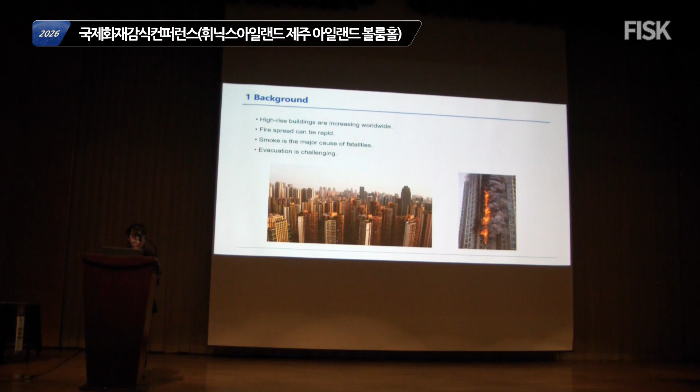The residential estate where the fire occurred consists of 8 buildings with a total of 1,984 residential units. Each building has 31 floors, with 8 units on each floor. According to data from the 2021 Hong Kong population census, the total population of the estate was 4,643. Prior to the incident, the estate was undergoing external wall renovation, and all buildings were covered with scaffolding and protective mesh.

With this background in mind, I will now move on to the fire incident itself. At approximately 14:51 on November 26, 2025, the fire broke out in one of the buildings. 10 minutes later, the fire spread to other buildings. At 15:02, the fire was upgraded to a 3-alarm fire. At 15:34, it was further upgraded to a 4-alarm fire. By then, 7 buildings had already been engulfed in flames.

At 18:22, the incident was escalated to a 5-alarm fire. At 1:50 on November 27, open flames had been extinguished in 3 buildings, while only scattered fires remained in the others. However, at 23:15 that night, one building ignited with significant flames, and 2 other buildings showed visible fire activity. Finally, at 10:18 on November 28, the fire was largely extinguished. The entire incident lasted 43 hours and 27 minutes.

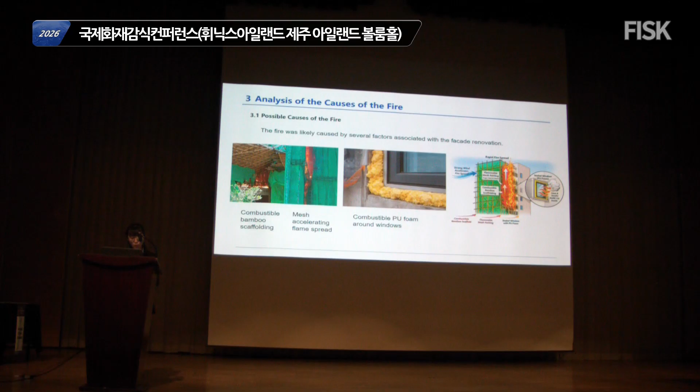According to preliminary investigation data, the fire initially started in the protective netting on the lower exterior of one building. After 10 minutes, the fire rapidly spread through these external materials to nearby structures. The exact ignition source is still under official investigation, and law enforcement agencies have already made arrests related to suspected violation of construction regulations.

From the perspective of fire science, several key factors contributed to the rapid fire spread. First, combustible exterior covering materials. Materials used in the renovation work, such as bamboo scaffolding, dust-proof nets, waterproof tarpaulins, plastic protective mesh, and foam coverings, have relatively low ignition points. Once exposed to a fire source, they can ignite easily and promote rapid flame propagation.

Second, the chimney effect. The scaffolding surrounded the entire building and created cavities between the scaffolding and the wall. In addition, the building facade and recessed structural features together likely produced a chimney effect, accelerating the upward spread of the fire.

Third, a combustion chain reaction from the outside to inside. Burning exterior materials could ignite covered windows and indoor combustible materials, allowing the fire to spread from the outside facade into interior spaces.

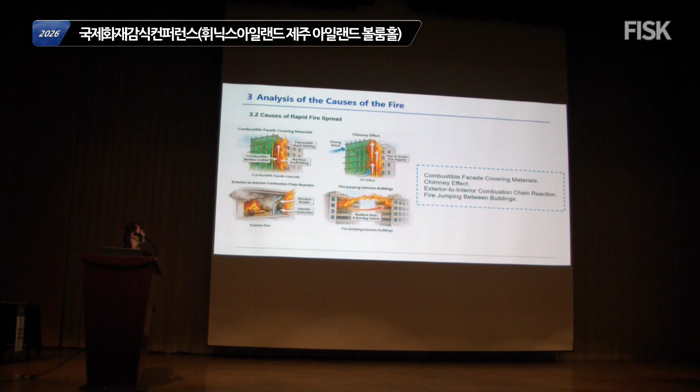Reports indicate that at least one building's fire alarm system had been temporarily disabled, to allow construction workers to move in and out of the building more conveniently. As a result, the early warning function was limited during the initial stage of the fire. In addition, the rapid spread of smoke and the failure to hear alarm signals may have delayed indoor fire response measures and evacuation actions.

Limited firefighting equipment also contributed to the delayed control of fire. The fourth limitation involved the aero-ladder trucks. The main operational firefighting ladder vehicle in Hong Kong has a maximum working height of 56 meters. However, the building involved in this incident was 31 stories high, exceeding 90 meters, and had been standing for 42 years. This means that when the fire spread to the middle and upper floors, existing external rescue equipment could no longer reach the affected area effectively.

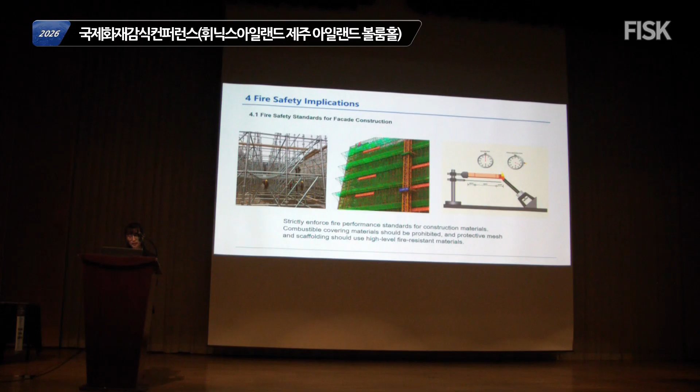During facade maintenance or renovation, residential complexes must strictly enforce fire-resistant standards for construction materials. Combustible covering materials should be prohibited, and scaffolding and protective sheeting should use high-grade, fire-resistant materials. High-rise and large residential buildings typically rely on automatic fire alarm systems, as they are the primary early warning and evacuation guidance mechanism. These systems must remain fully operational during construction or renovation periods, and intentional shutdowns should be strictly prohibited.

This fire showed a rapid spread from the exterior into multiple buildings, highlighting the need for stricter planning and inspection of vertical and horizontal fire separation measures within building complexes. This includes fire-resistant zoning, facade insulation systems, and smoke control systems.

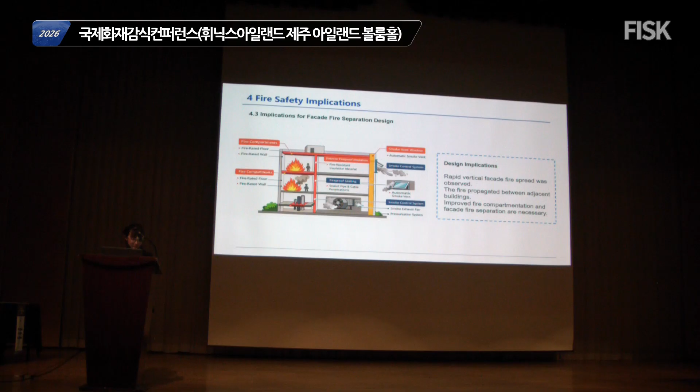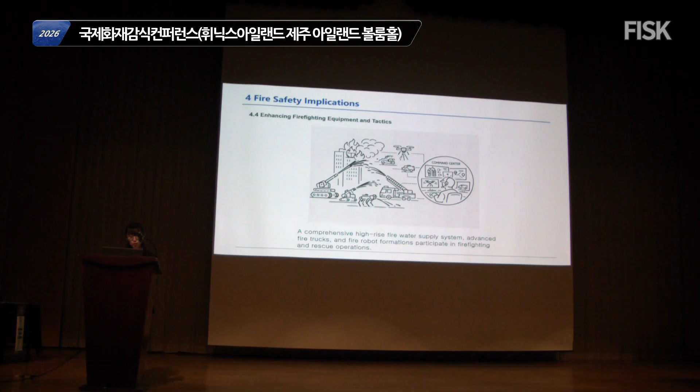Firefighting equipment and tactics need the following improvements: more robust high-rise firefighting water supply systems, fire engines equipped with advanced high-pressure jet technology, and deployment of high-power industrial firefighting drone fleets operating under unified command systems to conduct coordinated and separation-based firefighting operations.

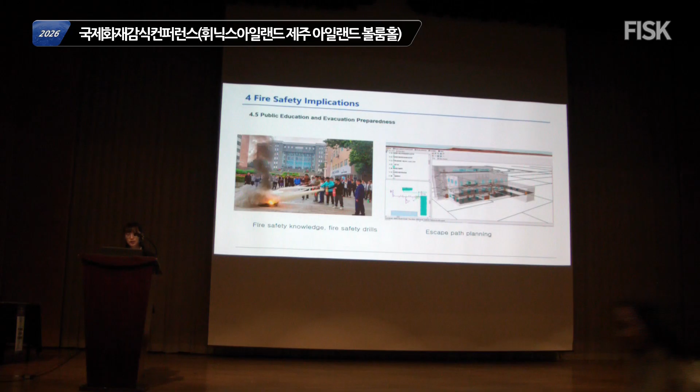Finally, residents of high-rise buildings should be equipped with basic fire evacuation knowledge, including how to identify safe escape routes and how to block smoke infiltration during fires. Such knowledge is essential for reducing casualties during fire emergencies. My presentation concludes here. Thank you for your attention.

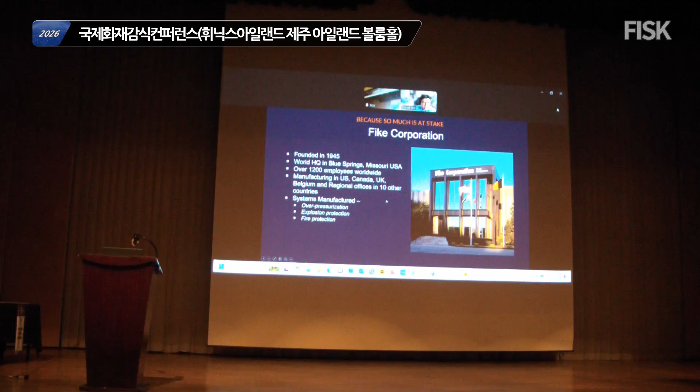FIKE Corporation was founded in 1945, headquartered in Blue Springs, Missouri, with manufacturing plants in the US, Canada, UK, Belgium, and regional offices in 10 other countries, including mine in Kuala Lumpur, Malaysia. We do overpressure, explosion protection, and fire protection business, and now we are more into explosion protection. I will start with a bit of fundamentals, then go into some case studies, two brief cases and one in-depth, and finally what we can do to prevent things from happening.

We start from fundamentals, the fire elements: ignition, combustion, dust or fuel, and oxygen. When we have the fourth element, we call it flash fire. When we have a dispersion of dust in the air, we call it a dust cloud. And when the fire triangle comes along, we will have a flash fire, something like this. Then the fifth element is confinement, which you can call an enclosure or dust collector. With these five elements together, we will have an explosion.

When we talk about explosion, often we talk about dust hazard. We also focus more on dust in this section, not gas. So when we talk about dust hazard, why dust? It's because dust often has a higher rate of combustion. Why? It's because of the particle size. The smaller the particle size, the more surface area there is to burn, which increases the rate of combustion. That's why you have very fast combustion.

So the first step of managing the dust hazard is to understand your dust and material properties. You can get this from vendors, probably from an MSDS sheet or from a textbook or NFPA standards or any online database. You need to do testing when data is not available, when the particle size or moisture content is different from the published data, or when a mixture is being handled.

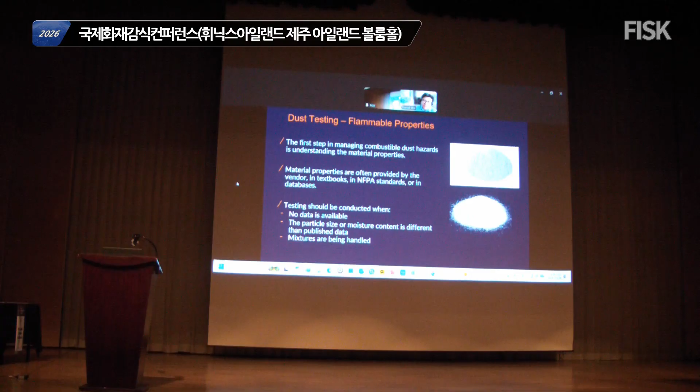Examples of hazardous dust: we have agriculture dust, carbonaceous dust, chemical dust, and metal dust. If this dust is somewhat familiar to you, you may want to take note.

So what is dust testing? These are the common dust testing methods that are available in the market. We'll go deep into them here.

The first dust testing is what we call the go or no-go test. What it does is we ignite the dust and see if it's combustible. If this fails, then everything else is irrelevant. If it passes, then we need to go to another test, the severity test.

Severity is how big the explosion is and how fast the explosion happens. I'll dig deep into that later.

Other than that, it's more about the atmosphere, or flammable atmosphere. We need to know the minimum concentration required for the dust explosion, and we need to know the limited oxygen level. The third one is the sensitivity of the dust.

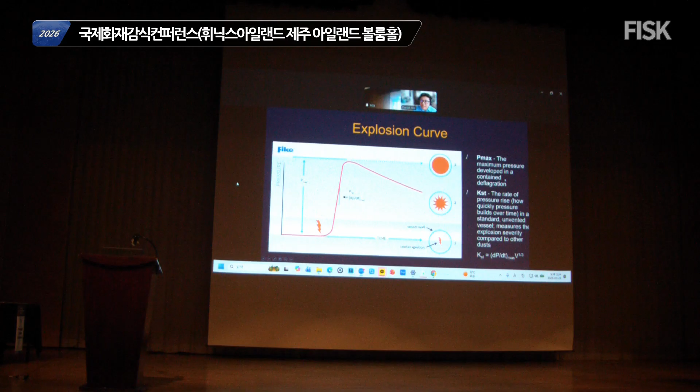As I mentioned, the severity of the dust explosion is determined by this explosive dust test, where we want to know the rate of rise of pressure actually developed in a contained explosion, which we call Pmax. These are the two pieces of information we want to know.

Then we talk about the primary and secondary explosion. The primary explosion usually refers to where the explosion originates. For this picture, it shows that the explosion originates from this equipment, and the equipment fails.

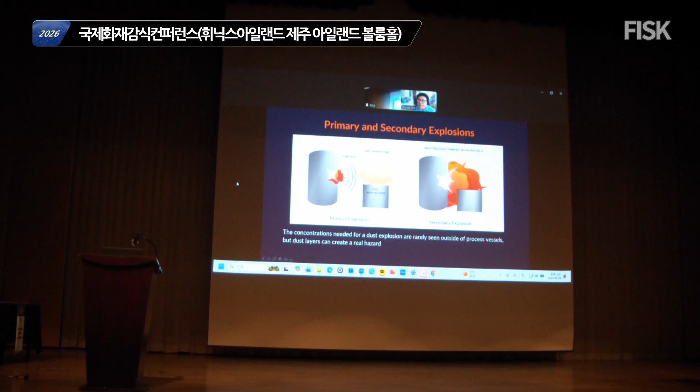That's why the pressure and flame come out. If the environment is dusty, the blast wave will disrupt the dust on the floor, on the equipment, or on the ceiling, and create a dust cloud. The flame that comes later with the initial source will create a flash fire or a secondary explosion, as you can see in the second picture on your right.

So this is another vector animation just to show you what a secondary explosion is. Let's say the explosion originates from the cyclone - you have a big shot on the building which causes disturbance of the dust on the floor, on the ceiling, on the equipment, same as the previous slide. Then you have a lot of dust cloud, dispersion of dust, and the cyclone fails.

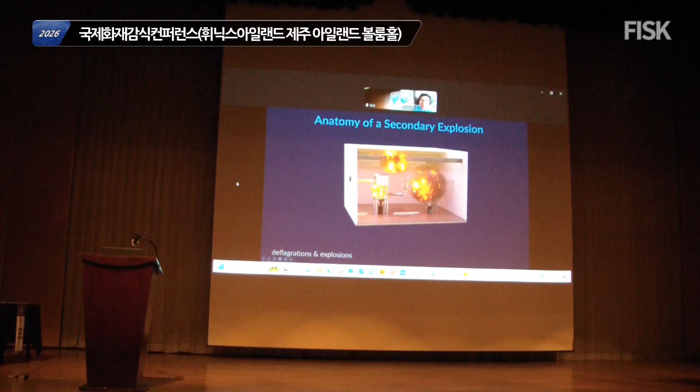I mentioned that the cyclone enclosure strength is smaller than the Pmax. It may fail and start to create an explosion on the equipment as well. As it fails, it creates an ignition source in the dispersion of dust and creates a secondary explosion externally in the building, as well as in the dust collector, as the flame propagates to the dust collector. If the explosion pressure is high enough, instead of a flash fire, it will become a containment explosion, and therefore the building will fail as well.

So, let's move on to a case study. We have 3 case studies, and we'll go through the first 2 quickly, then the last one in more depth.

The Imperial Sugar incident is a very famous explosion that happened in the US, where they make sugar dust. It began from the conveyor belt, and based on the investigation, it was due to an overheated bearing, which caused 14 fatalities and 60 injuries. Before the incident, there was a lot of dust lying in the equipment and process equipment, which caused a secondary explosion and resulted in what you see in the previous picture.

The second case is West Pharma. What they make is rubber for syringe rubber plungers or rubber stoppers, small rubber parts.

In this process, it's actually a very clean environment where rubber is rolled in a roller, coated with polyethylene dust, and then a fan blows it. Over time, the polyethylene dust accumulated in this compounding area through the aircon duct. A lot of dust built up over many years, and when a small explosion happened, again a secondary explosion occurred, resulting in the catastrophic explosion you see in this picture, causing 6 fatalities and 38 injuries.

Everything happened due to a bit of process issue. First, they had a temporary line to consolidate the pump, the blower, and the siphon from left to right. From the process, they have 2 mills going to the siphon and to the toric filter, and the bottom outlet of the siphon flows to the cyclone, then sifter, and the dry grid filter. As you can see, they utilized the same blower instead of separate respective blowers and cyclones - they consolidated it.

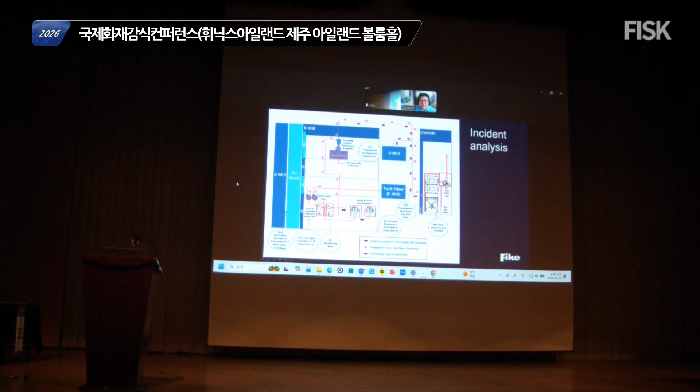Because they consolidated it, the flow was insufficient, causing the product to lump in the connecting pipe. Based on the investigation, they believe there was smoldering inside the pipe between the connecting pipes, causing a small explosion that flowed to the rotor on the mill and caused the first, primary explosion, as well as flowing to the receiving hopper and later to the dust collector called the dry grid filter, causing another explosion that flowed back to the D mill and the B mill.

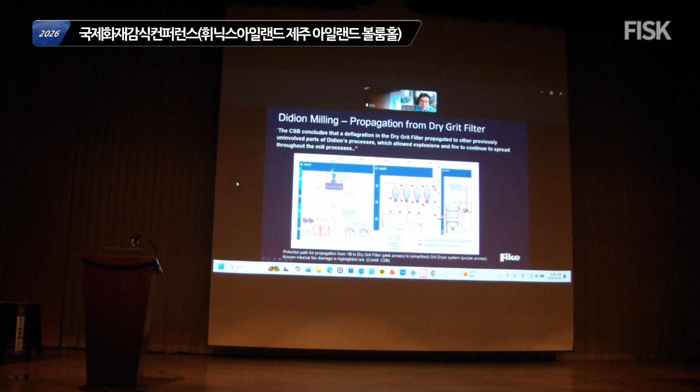This shows more details of what's contained inside the D mill - there's a lot of cyclones and later the dry grit filter.

So what are the flaws? There are a lot of flaws in this explosion. I've picked a few that are most critical due to time constraints. The first flaw is that Didion did not recognize that the product they make is combustible. Even the SDS, as you can see here, was not available during the investigation.

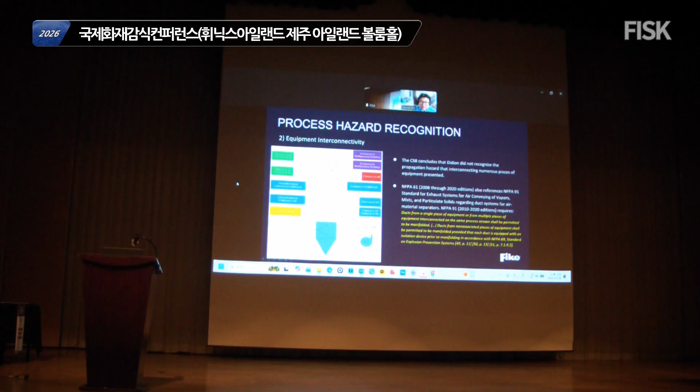Another flaw is that there's a lot of interconnectivity through pipes between the dry grit filter and mill B and mill D. There are 40 plus pieces of equipment directly and indirectly connected to these dry grit filters, and there's no isolation, so flame could propagate through the other equipment.

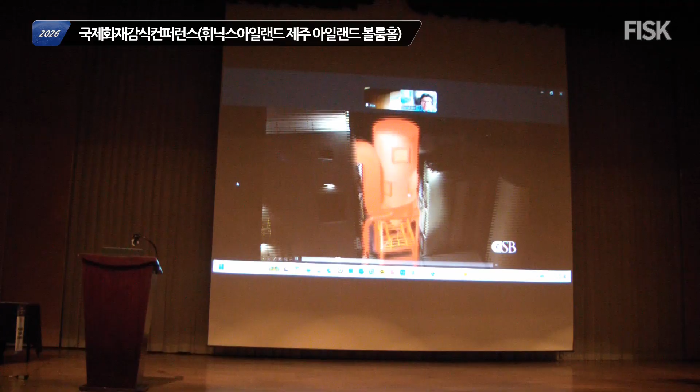As you can see here, this is a typical flame front video where the explosion pressure disrupts the dust inside the pipe and the flame follows. As mentioned in the illustration, the flame originates from the cyclone, goes all the way to the dry grit filters, and due to all the connecting pipes, flows back to mill B and mill D. This is the animation from the CSB investigation.

So a big explosion caused the whole factory to burn down.

So what was the fallout? Three officials were sent to prison due to falsified documents or fraud, and Didion was sentenced to pay 10 million in restitution and 1 million in fines.

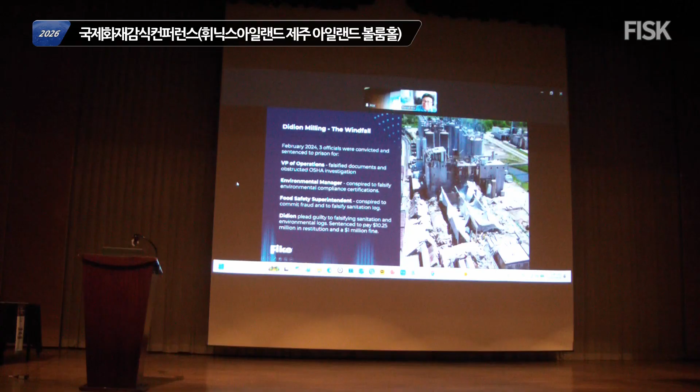So how can we prevent it? First, let me explain the standards. We have 2 standards or guidelines we can follow. In the European Union, we have ATEX standards, and in the US, there's a guideline called NFPA 652 that we can refer to. These are 2 globally recognized standards and guidelines.

There are also some local guidelines and standards - in Singapore there's SS 667, and in China they have GB/T 24353. So there are some local guidelines as well. Next is about the consultation-guided journey - all of this can be prevented if we have this executed.

So on this consultation guide journey, first we need to understand the material properties, whether it is combustible or not combustible, and the characteristics of your products. Then we go on to analyze the hazard of your process, explosion hazard on your process, and then we develop a mitigation strategy.

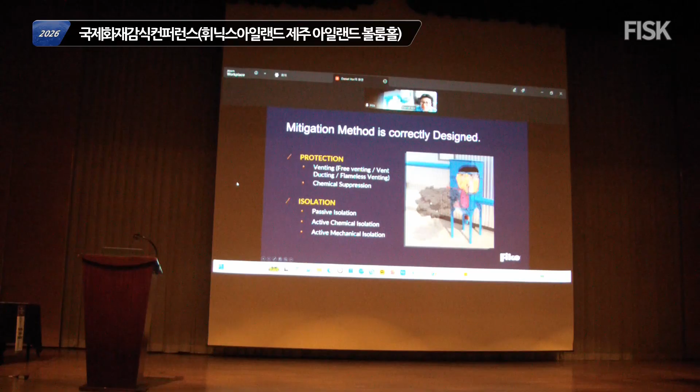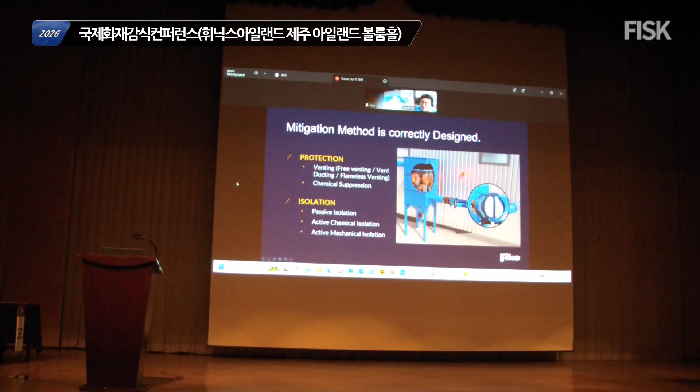The third one is the suppression method, where in layman terms you have a fire extinguisher directly installed into the equipment to activate and pump out a suppression agent to kill off the fire. Then, as mentioned just now, we also need to have isolation. Passive isolation is commonly known as a flapper valve, but the con is that the explosion pressure and the process pressure need to be in opposite directions. And then we also have chemical isolation, similar to suppression but on the pipe, as well as mechanical, like a gate valve or pinch valve on the pipe.

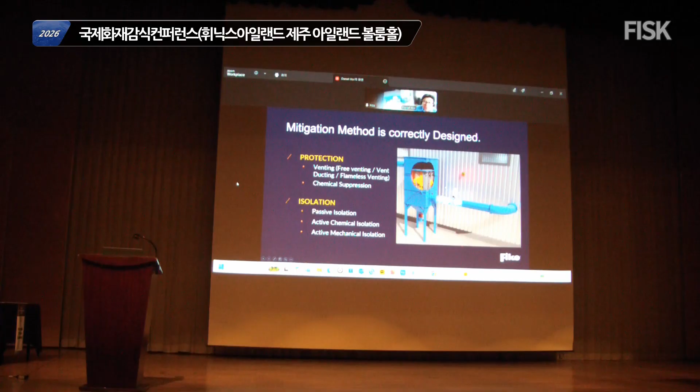So there are many different kinds of protection methods, with pros and cons for each. The correct approach is to use the appropriate method based on the site condition or the customer process, whichever fits best. The protection method is customized, a one-to-one solution, not a copied solution. You need to make sure the protection equipment is correctly placed. For example, in a dust collector, you do not want the filter to block or disrupt the flame path for venting. You need to have the correct setting, making sure that the process condition does not activate the system.

Appropriate installation and further maintenance is more towards the supplier manual, so you need to make sure it's installed correctly, otherwise it will not work as intended, as well as maintain it. Management of change: when you have any changes in your process, you may need to redo the design. For example, if you change your product, your KST value and Pmax value may differ, and you may need to redo the design process and make sure that the system works.

So recommendations: if you do not have a DHA conducted, please get it done. If you have a DHA completed, make sure you have an action plan to address all the recommendations in the DHA report. And if you have any new process or equipment, make sure you get your DHA completed on the proposed design as well. This is more on the management of change. And then employee training.

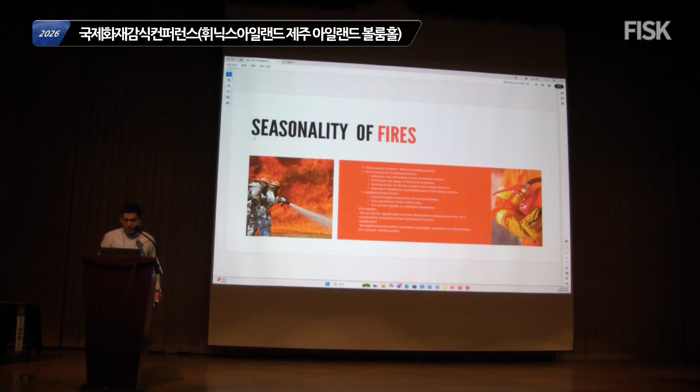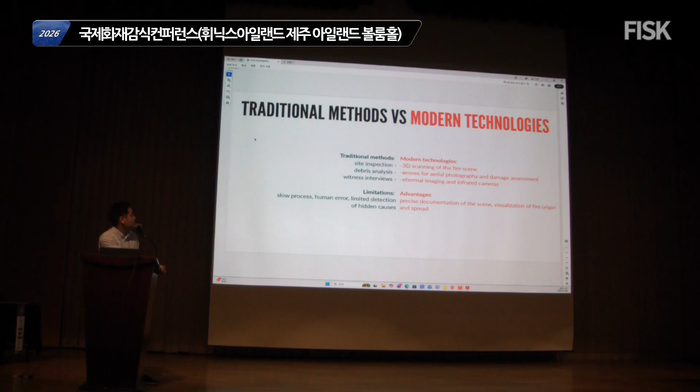Here are two types of investigation. The first type is traditional methods, the second type is modern technologies. Traditional methods are site inspection, analysis, and witness interviews. Their limitations are a slow process, human error, and limited detection of hidden causes. The second type is using modern technologies: 3D scanning of the fire scene, drones for aerial photography and damage assessment, thermal imaging and infrared cameras. Advantages: precise documentation of the scene, visualization of fire origins and spread.

Laboratory and analytical technologies are also an important part. Use of chemical analysis to identify accelerants and flammable substances, gas chromatographs and spectrometers for analyzing fuel residues and combustible materials. Computer modeling of fire spread. Application of artificial intelligence systems to predict fire behavior and determine the primary point of origin.

Digital technologies and artificial intelligence. Surveillance systems and IoT devices for real-time monitoring of fire incidents; AI and machine learning for automatic detection of anomalies and suspicious factors; fire databases storing information for cause analysis and prevention of recurrence; VR and AR technologies for training experts and simulating fire scenarios for investigation practice.

As a conclusion, implementing modern methods in the Kyrgyz Republic allows reducing investigation time, increasing accuracy in determining causes, and minimizing human error. Combining traditional and modern technologies ensures effective fire investigation and prevention.